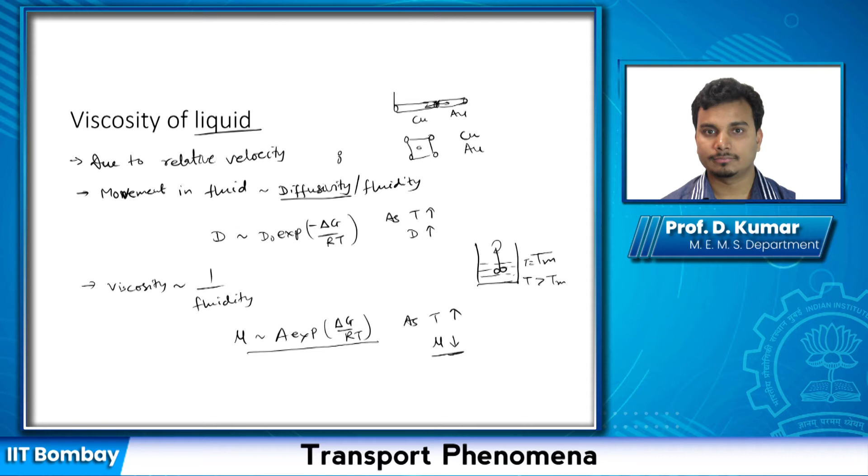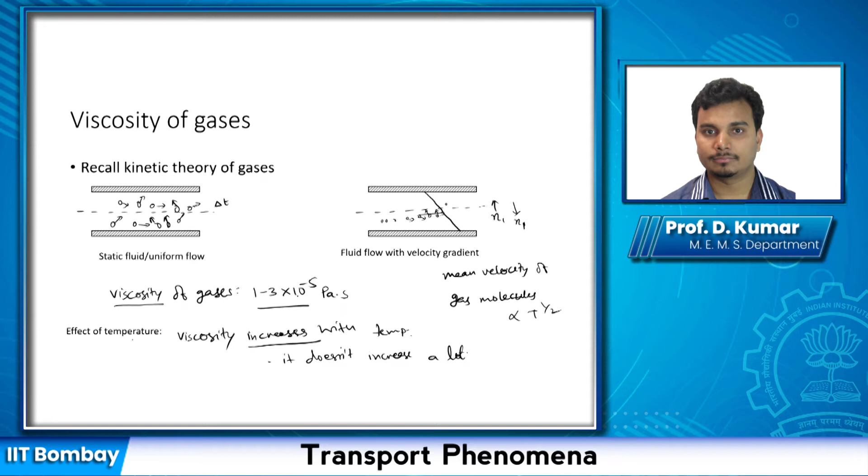So here you see the typical values of viscosity. Depending on material, it can vary from 10 raised to minus 4 to 10. So five orders of magnitude it can vary in pascal second. So you can see that in this case it varies a lot, unlike gases where it didn't vary much. Gas is typically 1 to 3, or 1 to 5 or 6 if you consider temperature effect, times 10 raised to minus 5 pascal second. Things like acetone or liquid alkali metals can be maybe 5-10 times higher than the gases. But in general, the liquid will have much higher viscosity, which makes sense.

Viscosity is also related to drag. So it's easier to fly than if you are going through water, like a submarine and so on. Anyway, so this essentially gives the typical values of viscosity.

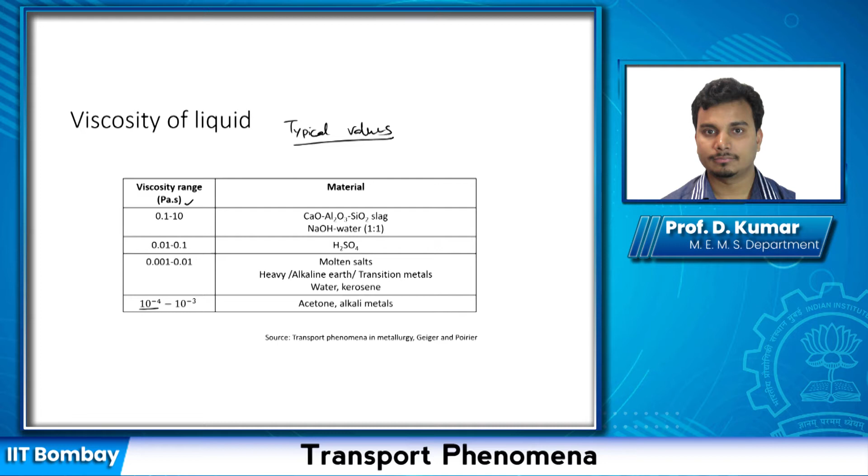So you should have some idea on order of magnitude, at least. If someone says how viscous gas is, it's about 10 raised to minus 5 pascal second. And the liquid is higher than that, depending on the liquid: a lighter liquid like acetone is 10 raised to minus 4, but something like slag is of order 1 or 10 pascal second. Think of this in terms of the weight of an ant versus the weight of an elephant. If it is an order of magnitude variation, you should be able to tell whether it is close to the ant or close to the elephant. That kind of idea at least you should have.

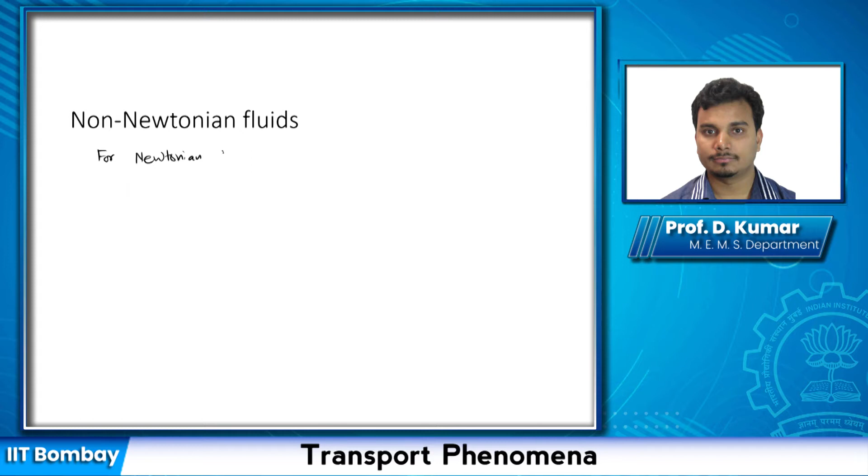So now we saw that for Newtonian fluid, the shear stress was mu dvx by dy. So it is proportional to dvx by dy. This is typically given in terms of strain rate. So del x by del y will be strain, and then you divide by time, so that becomes a strain rate.

Typically, all gases and single phase non-polymeric liquids follow this Newton's law. It's important to know the single phase. There could be immiscible liquids, and then there will be multiple phases. There could be two phase liquids as well. So gases and non-polymeric single phase liquids generally follow Newton's law, and they cover a wide range of materials. However, there are cases where Newton's law is not valid. So non-Newtonian fluids.

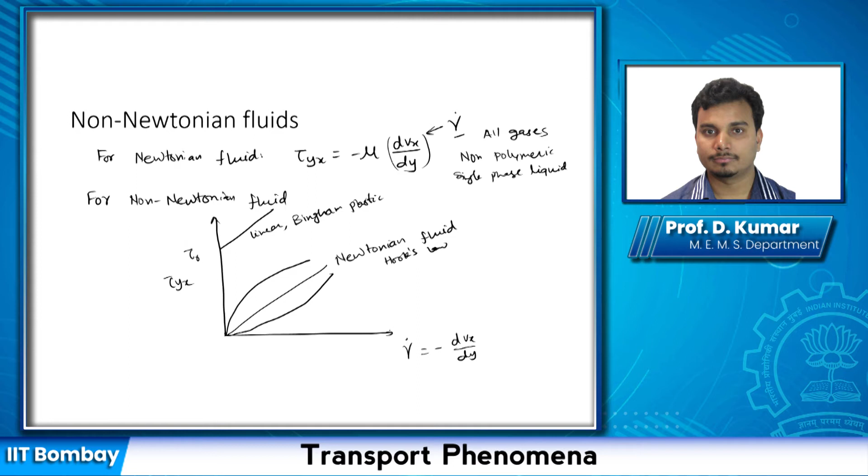Shear stress is always non-zero if fluid is static, if fluid is in motion, or there is a relative motion within the fluid. So this is very important. You can look at this graph. If there is some strain rate, that means the fluid is in motion, and if it is in motion, then you can see that there has to be shear stress. So you can answer these things.

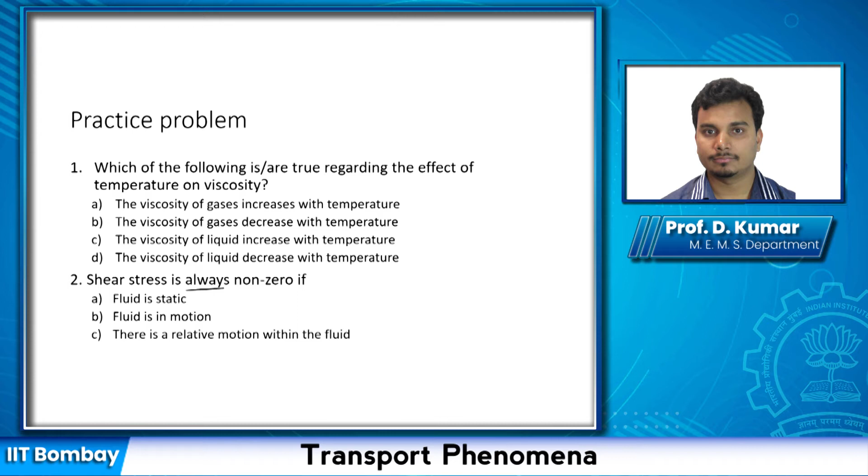So next we'll look at momentum conservation, through this example of flow through a circular tube. So let us say we are looking at downward flow. Before we get into the momentum conservation equation, let us first look at this flow. So to start with, here you have a uniform flow, right?

From this reference line, the length of all velocity vectors is the same. So this is a uniform flow. Now let us track this one. There's a fluid particle that is coming, and it comes into contact with this static surface. The surface of the tube is not moving. Then this fluid has to come to a complete stop because of the no slip condition.

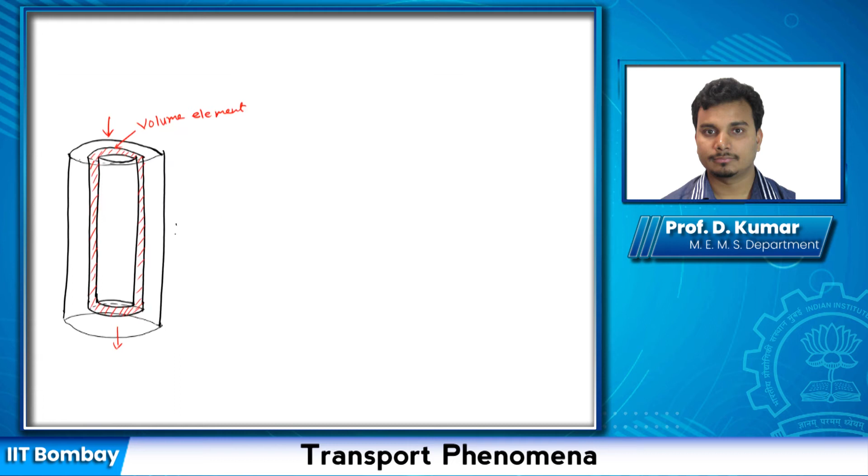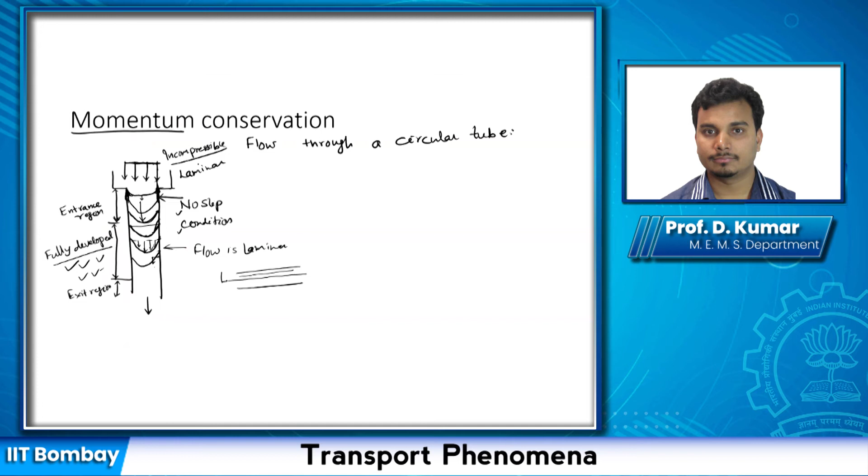And in the description of this flow through a circular tube, we are only concerned with what happens in the fully developed region. Okay. So let us take a section of length L, but this length L is in the fully developed region. Before we go to this, we should make sure what we want to know. Now that we are looking at fully developed laminar incompressible flow, what we want to know is a few things.

First of all, in this developed flow region, of course, you want to know that for the entire tube, what will be the pressure drop? So if the pressure here is P1 and here is P2, what will be the pressure drop, or pressure gain, whatever. In this case, we are going in this direction. It will be easier to think if you have a certain pipe like this, or it can be horizontal. If you want to flow a certain amount of fluid, what should be your supply pressure? If you already know this pressure, what should be the supply pressure?

We want to know it per unit length and so on, because remember, from the overall energy balance, there is some mechanical energy or potential energy loss, rather we can say loss due to friction. There's relative motion between fluid layers, and then there's also this friction. So we want to know what should be delta P.

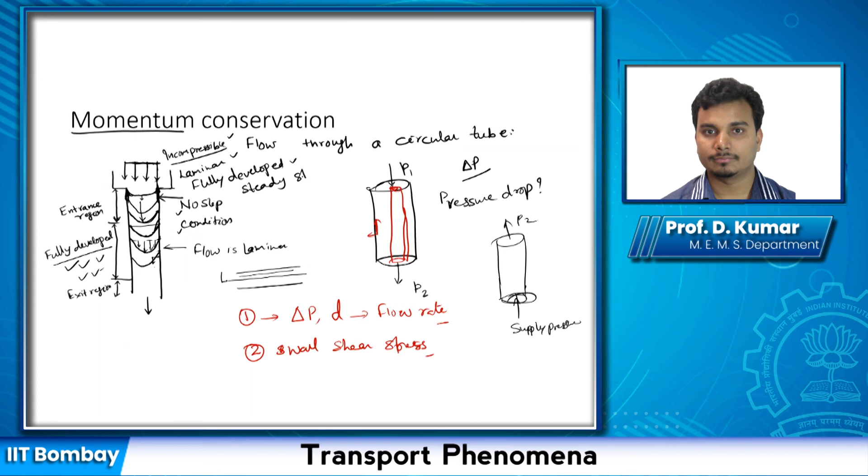Let us make one more assumption. So we have assumed incompressible, laminar, fully developed, and let's add to this steady state. Okay. So we want to write the momentum conservation equation. Before that, let us first do this. We always do these two: mass conservation and momentum conservation. First, let us do mass conservation.

Okay. So we start by selecting a volume element. This is a tube, so cylindrical coordinates are our natural choice. So this is the large tube, and inside that this is your R. Let's do it here. So this is R and then this is Z. Here you have Z equals 0, here you have Z equals L, and here you have R equals 0.

So we take this R, and then the thickness over here is dr, or start by delta r. Does not matter. Okay, so for flow, this is essentially a shell we are looking at. This is a shell. So this is also known as shell momentum balance and so on.

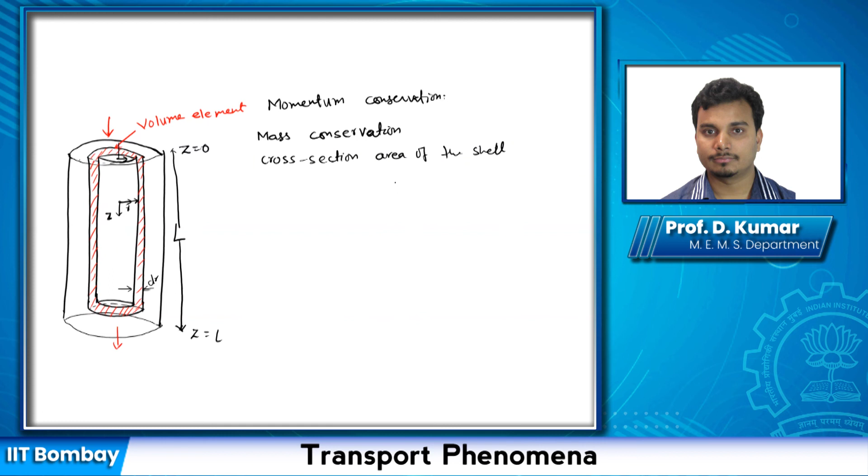So the cross-section area of the shell that we have considered is what? 2 pi r delta r or dr, right? Okay, so if we see how much mass of fluid is entering here, mass conservation will be mass in equals mass out, because we are at steady state. And we have assumed incompressible, so rho remains constant.

The cross-sectional area over here and over here is the same, 2 pi r dr, and then this will be vz, whatever is coming in the z direction at z equals 0, which should be equal to, density is same, 2 pi r dr vz at z equals L. So these things are same. So what we can say is vz at z equals 0 should be equal to vz at z equals L.

So this we have seen even when we were describing the flow; we also said that at any point this velocity at a given r does not change with the length in the fully developed region. Okay, so now let us do the momentum conservation.

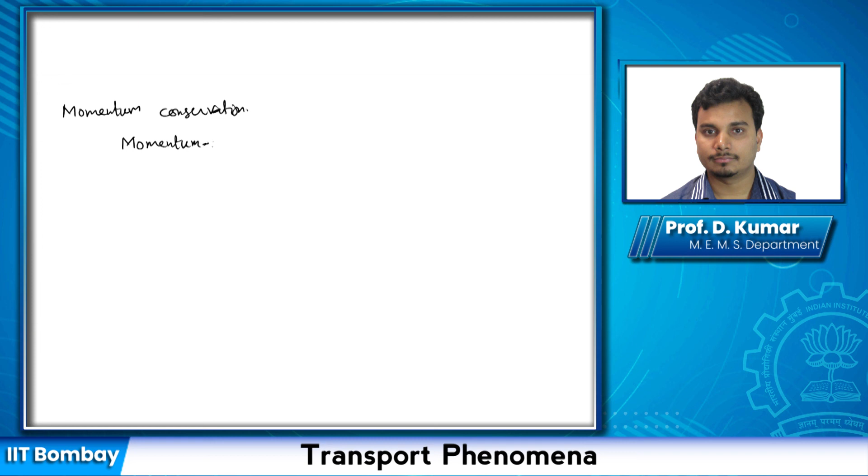So as usual, what we write is momentum in, like any conservation equation, minus momentum out, and there is no generation term, and it is steady state, so this will be 0. So now our main task becomes to identify what forces are contributing to this momentum, or rather rate of momentum. Rate of momentum is essentially the force. So what kind of momentums are involved in this case?

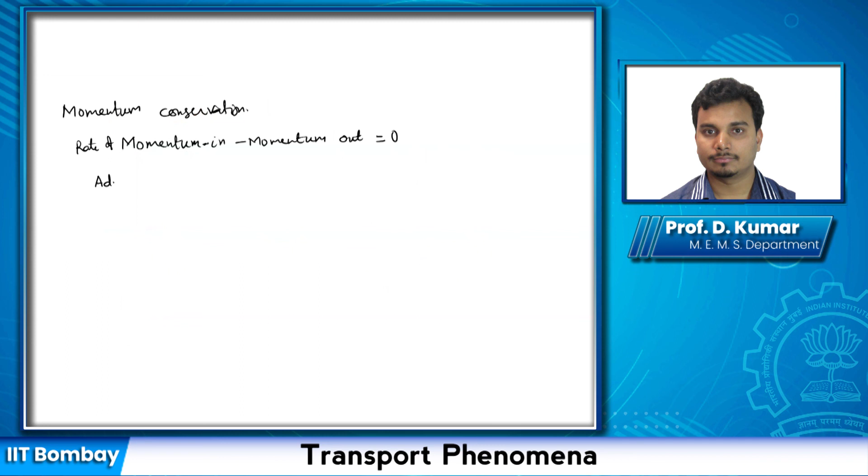So first will be the advection term. That is because of motion of bulk fluid. So if you write this advection term, it should be mass times velocity, where mass you can give as rho A vz, whatever enters at vz, and then velocity will be one more vz. So rho times area will be rho 2 pi r delta r,

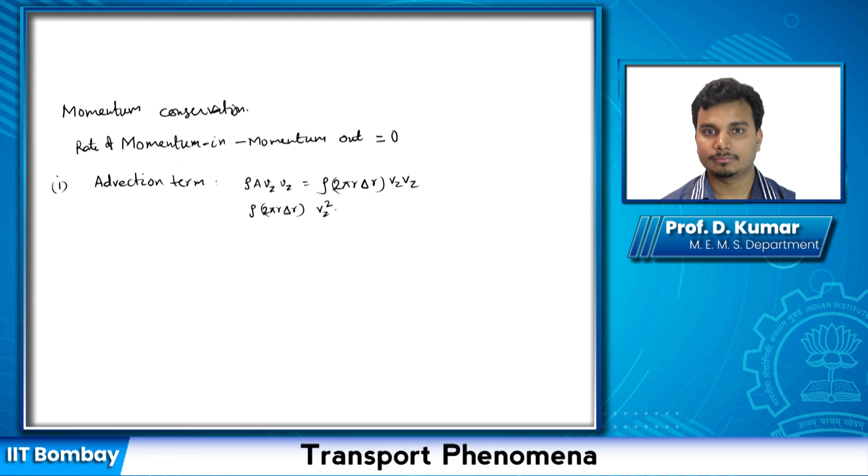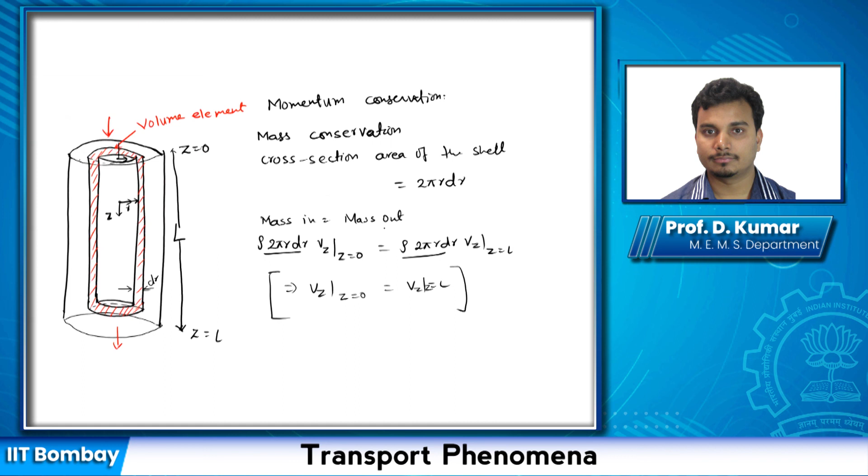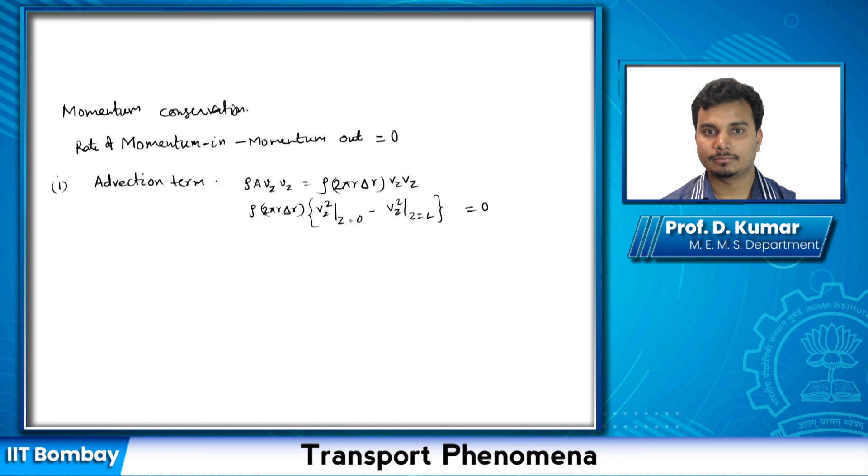and then vz. So if you write in minus out, this will be rho 2 pi r delta r times vz squared at z equals 0 minus vz squared at z equals L. But from our mass conservation, we know that these two terms are essentially the same. So this does not contribute; whatever momentum is coming because of bulk fluid motion is just going out. Okay.